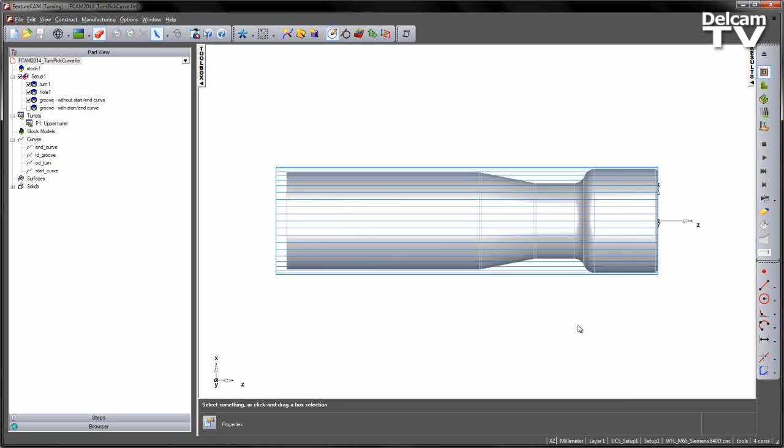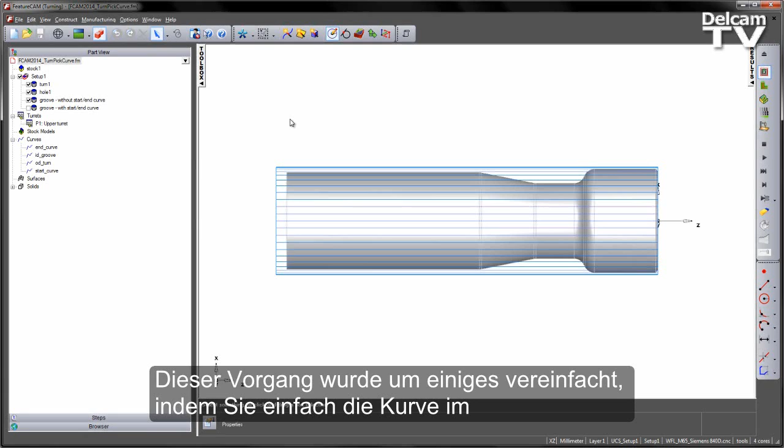Establishing start and end curves for turning operations has been made much easier in FeatureCAM 2014. In previous versions you would have had to remember the name, in this case I've got an end curve and a start curve, and I would have to take those names and enter those manually by typing those into the fields that I wish to change. This process has been made a lot easier by allowing you to simply pick the curve from the graphics window or from the part view.

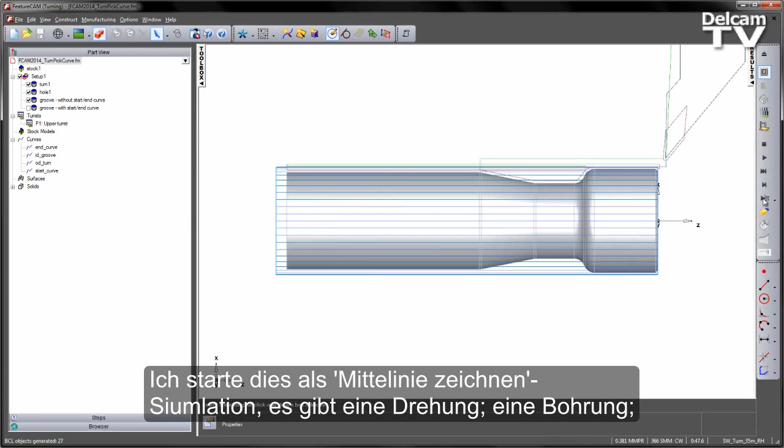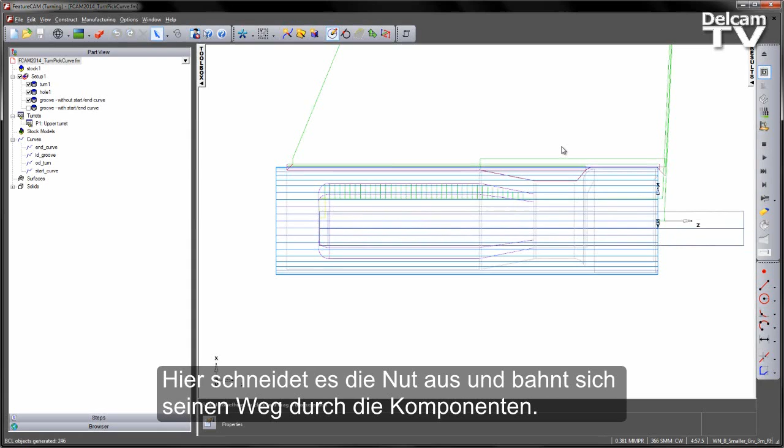And in this case I'm just going to turn off my shading so you can see this tool approaching my part. So here it's cutting the groove out, working its way down through the component, like so. You can see it moves straight into the finishing operation

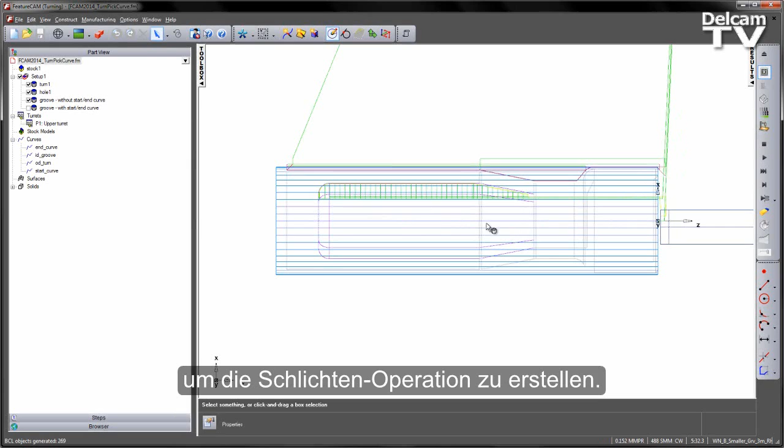and back out again. Now what I want to do is I want to control the movement into the part. I want to retract out, so once we finish roughing, some of the material will clear out, and then pull the tool back in to do the finishing operation. In this case I've got some curves. Note I've got an end curve and a start curve to control the tool movement.

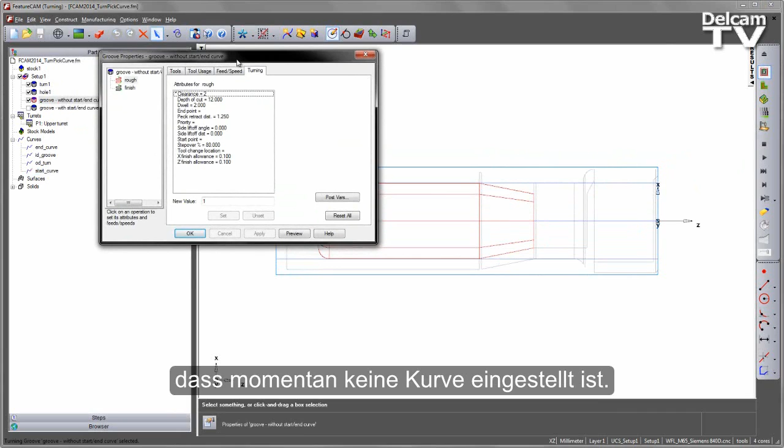I can go into the operation, into the roughing, into the turning tab, and in this case you can see at the moment I've got no curve set. To select my start curve I simply select the start point, and you'll notice there is a new icon next to the field, and go ahead and select the curve either from my part view, or I can do it directly from the graphics screen.

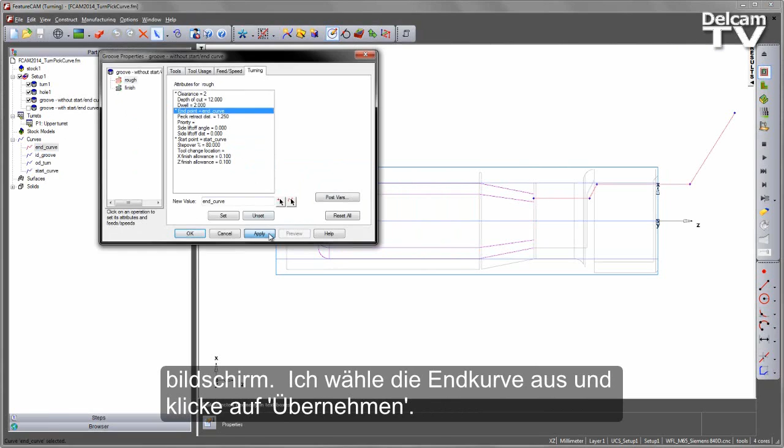So I'm going to select the end curve and apply. Those curves are now set in my roughing operation. I can repeat this process for the finishing operation as well, again selecting the start curve and selecting the end curve as well. I can now preview this operation,

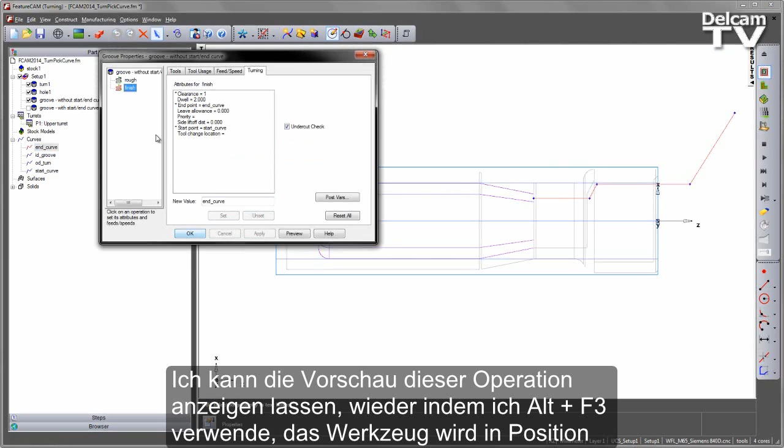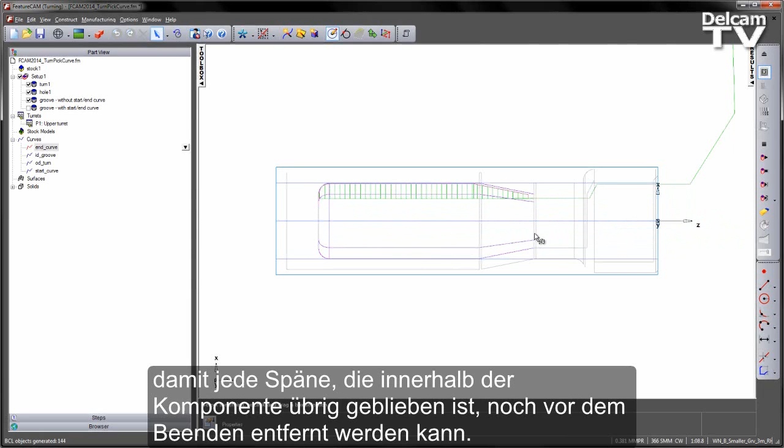again using Alt F3. Tool comes into position, follows that curve along, works its way into the part to clear the material, and then retracts back out so we can remove any swarf that is left within the component before we finish. Final thing, just to check on 3D simulation to make sure we're happy with the final result of our component.